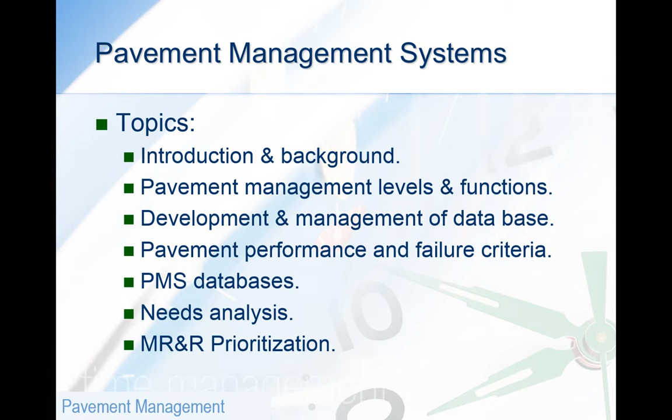So with that, let's start with the first chapter. Chapter 1 is an introduction and background behind the concept of pavement in general and pavement management systems in particular. So as you could see, this is really a schematic that shows the importance of our transportation facilities. As you see, the infrastructure in the US is really the basis of our economic system and has a direct bearing on our capability to compete in the international economic system.

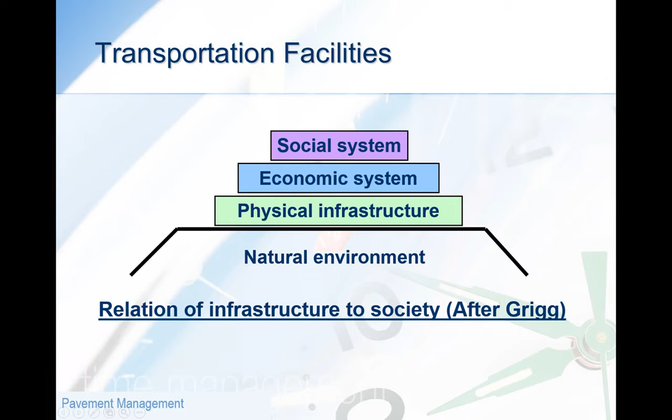As you could see, in front of the natural environment, we have our physical infrastructure. After the physical infrastructure, we also have the economic system as well as the social system. So it is really the base of our economic system, and it's very important to keep this infrastructure network functioning in the best case scenario.

This reference that I'm gonna give you here shows the interest of the private sector in the highway transportation system. In fact, this document describes the close link between the highway transportation network and the economy. Using this quote would give you an idea how the transportation facilities have a great link between the network as well as the economy.

Just as conveyor belts link factories internally, so must highways link supplies and customers. This is really what, in another course, transportation systems, we call a derived demand. I don't want to just drive, let's say, from Tyler to Dallas just because I like to drive. No, there is a reason behind it. You would go there for work, leisure, or get a flight from Dallas Fort Worth. So it's really a link between the supplies and the customers, which are us drivers.

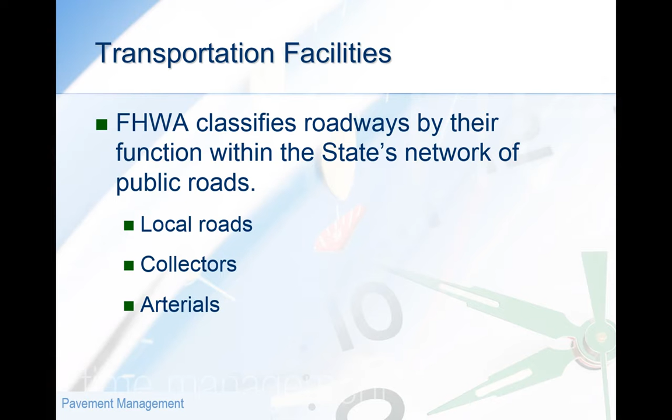So, talking about transportation facilities, what is FHWA? And in fact, I'm going to ask you in exams or quizzes about several acronyms and what they really mean. So, the Federal Highway Administration, FHWA, classifies our roadways by their function within the state's network of public roads. So we may have local roads, collectors, all the way to arterials, and eventually arterials will link to highways or freeways. So what do I mean by each one of those?

So the very first one is the local road. Local roads are the small roads that serve homes, businesses, farms, or even small communities. And the major goal behind having local roads is to provide access to the bigger roads, which are the collectors. The collectors channel traffic, so they connect the small roads all the way to the arterials, where the arterials are supposed to provide safe, reliable, and efficient travel between large towns and major cities.

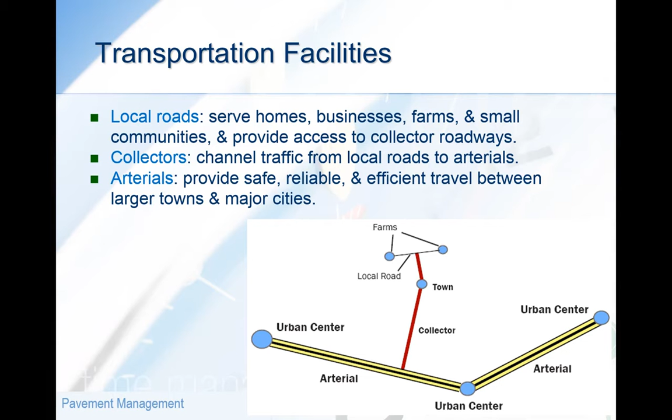I'm pretty sure now you start thinking of examples for local roads, for example, University Drive, all the way to the collectors. I would say a good example would be Loop 323, all the way to arterials. Arterials can be one of the big routes that connect, let's say, Tyler to smaller cities close to it, like Kilgore or Longview, which eventually connect to major freeways like I-20 or US 80.

Okay, and the other entity that also deals with highways and highway networks is the U.S. National Highway System, NHS. The US NHS is simply a network of roadways that is important to the nation's economy, defense, as well as mobility. It includes a lot of different highways. It includes all interstate highways, which are arterials. It also includes the strategic highway network, which is for defense purposes, and that's why the Federal Highway Administration funds those roads, because the condition here is they can be used in the time of war. Also, the NHS network includes intermodal connectors, such as roads that connect to major intermodal facilities, and any other arterials.

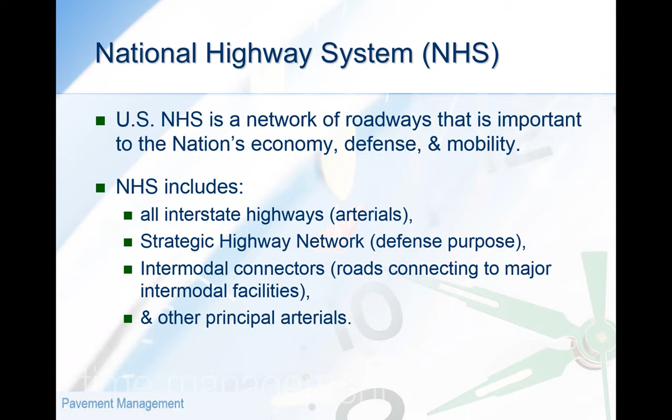So here to give you another perspective of how many thousands of miles. As of July 2008, NHS includes more than 160,000 miles of highways. And those 160,000 miles of highways are distributed into four major groups. We've got about 30,000 miles of rural interstates, 16,000 miles of urban interstates, 82,000 miles of rural other than interstates, and 34,000 miles of other urban streets rather than interstates. So there is a huge amount of miles that we as pavement engineers need to keep in the best conditions, so that we will be able to move goods and people from point A to point B in an efficient and safe way.

Another perspective here of looking at the public roads measured in center line length and lane length. As you can see here, this is history from 1985 all the way to 2006. The yellowish or orange line indicates lane miles, while the black line indicates center line miles. One of the things you would notice is the y-axis to the right has the lane miles in millions, and the y-axis to the left has the center line miles in millions as well. So as you can see, miles are increasing every year. Every year we are building new roads as well as maintaining the new and the old roads.

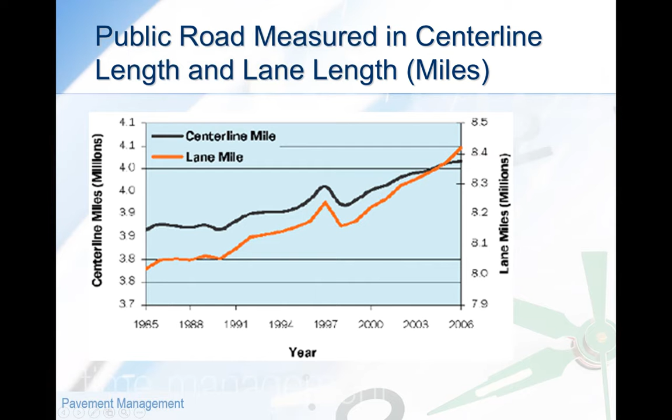One thing that is interesting, you would see that after 1997 there's a drop. So what happened? After 1997, forest development roads ceased being treated as public roads. This is why the figure indicates significant drops in both center line as well as lane mileage in 1998. But after that, the lane miles as well as center line miles pumped up again, and now it's back to the increasing trend since 1985.

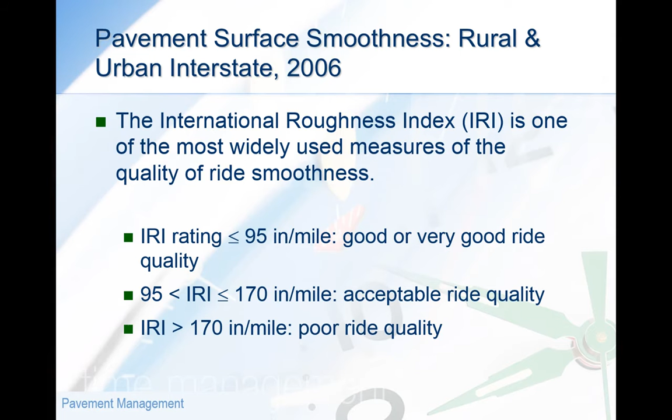Another figure I want to share with you is the overall health of our network. So when it comes to rural networks, we have about 78% in good shape, 20% in acceptable shape, and 2% in poor shape.

While when it comes to urban, only 60% are good, 34% are acceptable - meaning they really need a good amount of work as well - and 6% are poor. So there is a lot of work that needs to be done to keep maintaining those roads. The good roads, the 60% in urban or 78% in rural, will not be good forever. They will change and their quality will degrade over time, and that's why pavement management systems become handy to manage the system - how can I spend the amount of dollars assigned to me to keep my network in my city or state in an acceptable rate, or improve it.

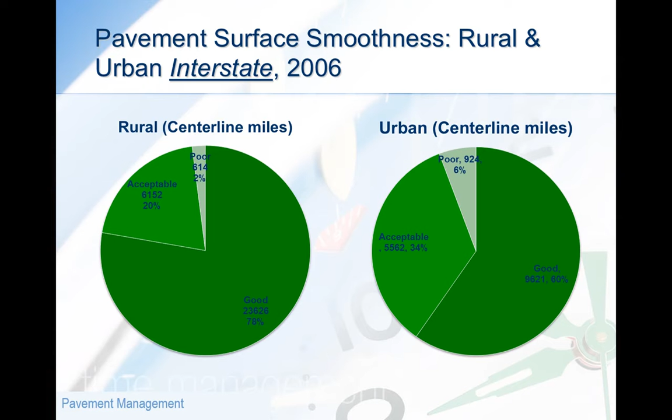For example, in rural roads, how can I increase the good roads from 78 to 85%, the acceptable roads from just 20 to 21%, and drop the poor roads to 1% or even less. That's what we're going to learn more and more in this class.

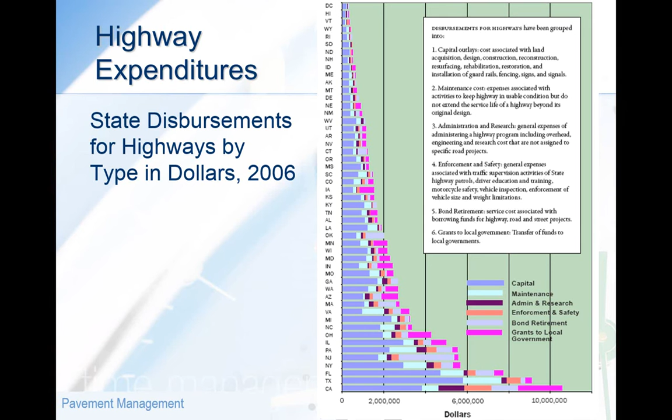Number 3 is administration and research, which is very minimal and keeps decreasing over time — this is one of the first things cut when it comes to budget cuts. But it's very important to keep research, because this is what really improves things, all the way to local governments, which is basically a transfer of funds to local governments.

Giving you another perspective here from interstate highways. Interstate highways really receive substantial federal funding. As I told you before, the major amount of funds come from the Federal Highway Administration.

90% are federal and only 10% are state, and those comply with federal standards.

So what happens is the Federal Highway Administration decided to fund those national highways.

National highways or interstates, so that they will be used in case of wartime. One of the conditions states have to follow is they have to comply with federal standards.

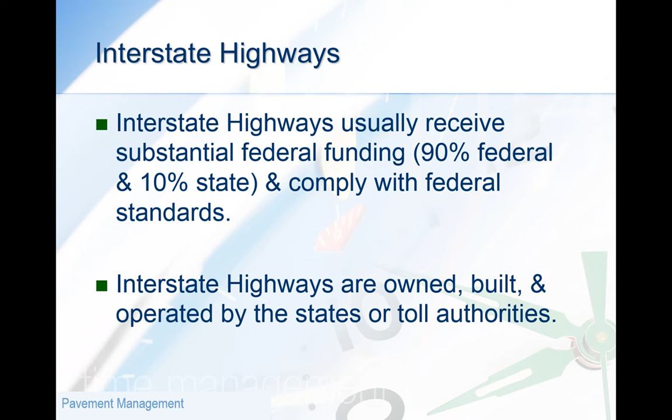Another perspective when it comes to management needs: highway agencies have been using various methods to manage this fund. The question here is, if I have $1 million per year, can I make use of that in the best way possible?

So that I can meet the highway needs within our jurisdiction. Construction of new roads was probably the best managed, with planning groups being developed in larger agencies to address where new highways would be built and to determine which should be funded.

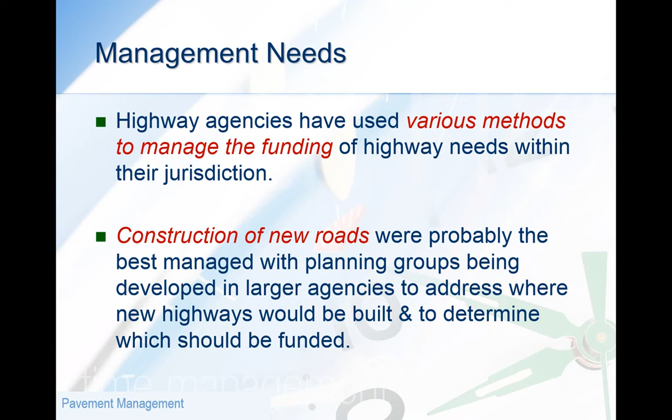So coming up with new construction is an easy thing. What's the hard part, which we're going to talk about, is how can I maintain the current roads. This is even the tougher job.

And that's what I'm mentioning in the next slide: maintenance and rehabilitation are managed with less formal methods. There's not much in the way of well-established methods that tell you, okay, this is the way to go, or this is what you need to do.

In fact, in several cases, crisis management developed, especially in smaller agencies, as the standard method to address maintenance needs when funds are short.

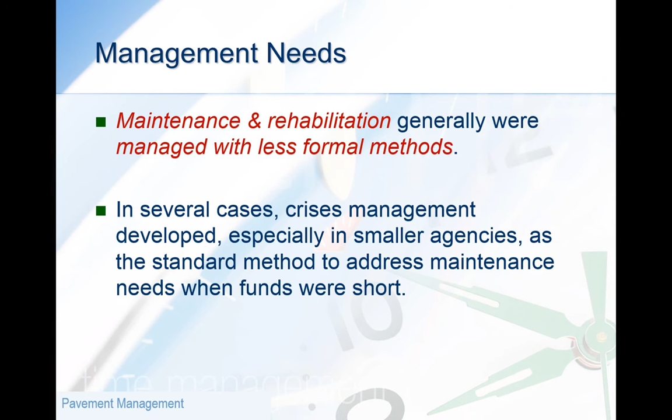And that's where the pavement management system comes in handy. In the last 20 to 30 years, pavement management systems have been developed to help plan the maintenance and rehabilitation of pavements.

How can I make sure that the money I have is sufficient to maintain my transportation network in good condition for the years to come?

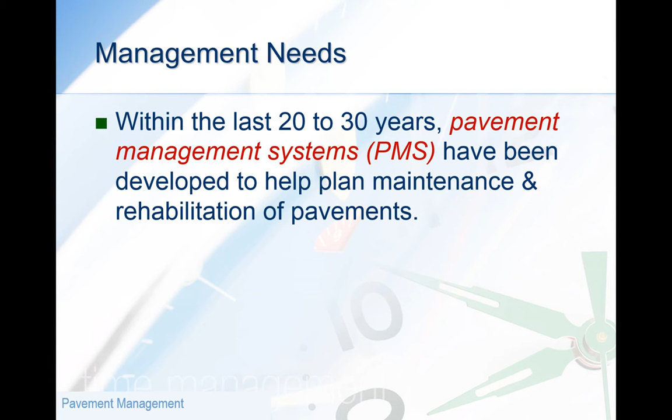So when I say systems, they are very necessary to avoid crisis reactions in public works.

These management systems are really the true application of systems engineering and basic management concepts to manage infrastructure, and eventually they provide a structured way to help get the most spent on the infrastructure.

This is actually the end of the introduction part of chapter 1, and I hope now you appreciate where I came from, very general information, all the way to the point that yes, constructing a new road is easy.

Maintaining the road and what methodology you're going to use to maintain and keep up the transportation system's health is not an easy job, and this is where pavement management systems come in handy. The tools we'll learn along the semester will give you some answers on how to maintain a road in very good condition.

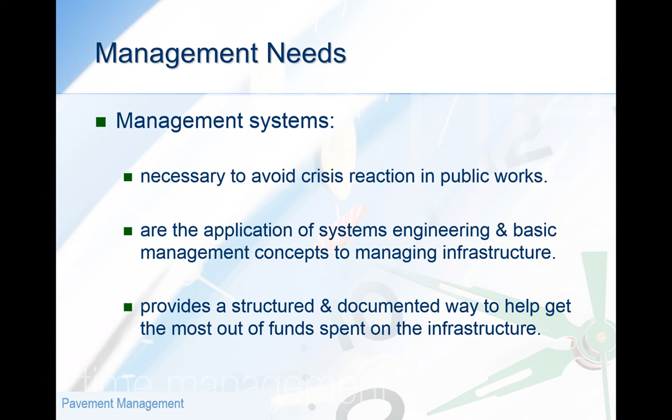With that, I've finished the introductory part, and we will meet next week to talk about the next topic, which is much more interesting: how do pavements fail?

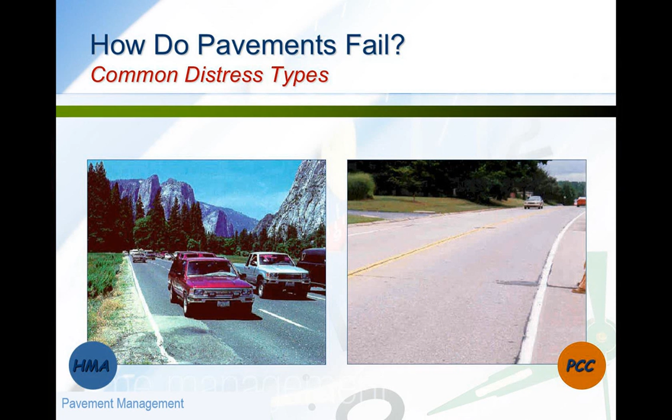What are the common problems or distresses that hot mix asphalt or Portland cement concrete face in our network? With that, again, thank you, and I'll see you next week.